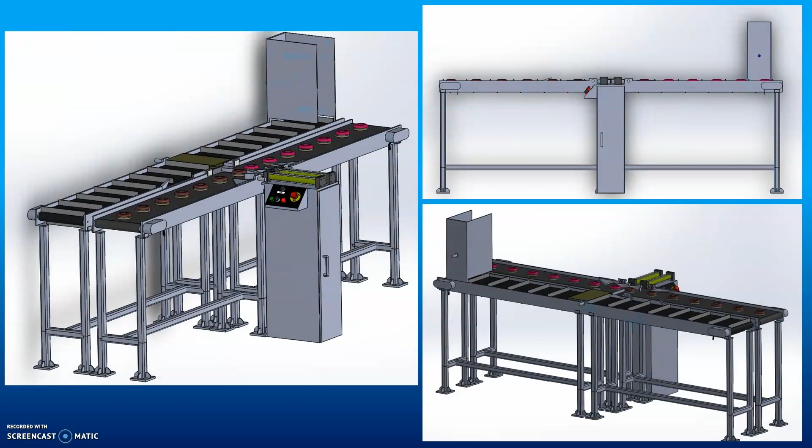Machine designing. For this part we have the design of our project and its different parts.

I will start by explaining the process. In this part, all the process begins or starts. We put the boxes in this container, 15 boxes fit, and this works by gravity. Then the band starts to work at this station.

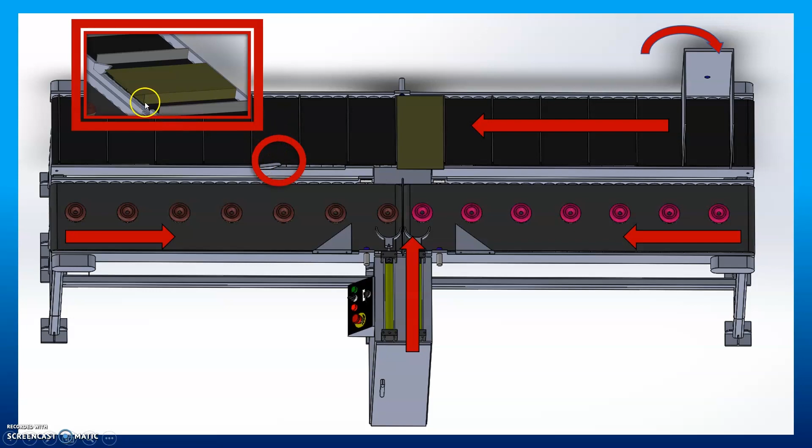In this part, the box is filled with the donuts, and finally we close the boxes with this tab in this part, like this.

This is the place where the different sensors are found in our project. We have 4 sensors. These 2 are for the boxes and this is for the donuts.

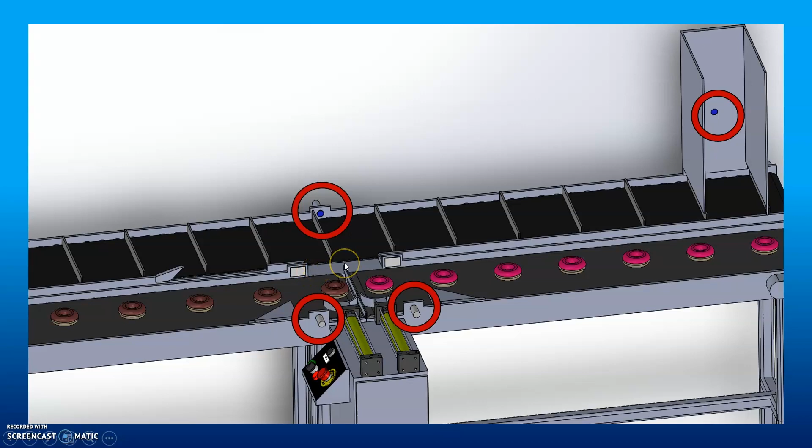And these are the places where the motors and the control panel are located. These 2 motors are for the bands of donuts, and this one is for the boxes.

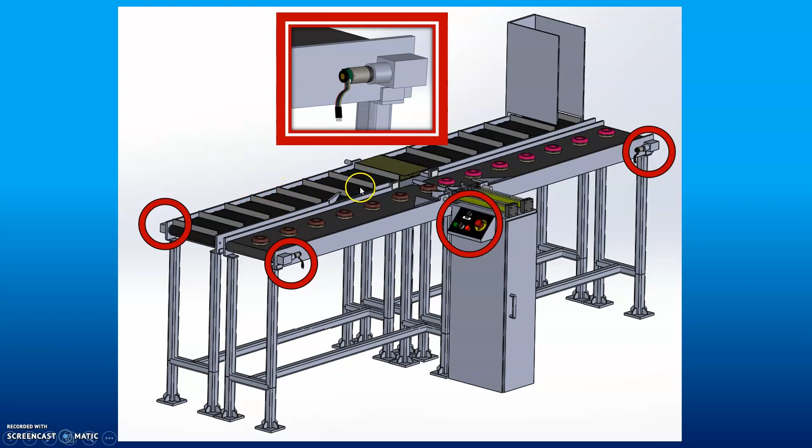Our control panel is very simple. It has turn on and off, the reset button, and the emergency button.

Well, I'll pass it to my partner Angel to explain the controls and actuators.

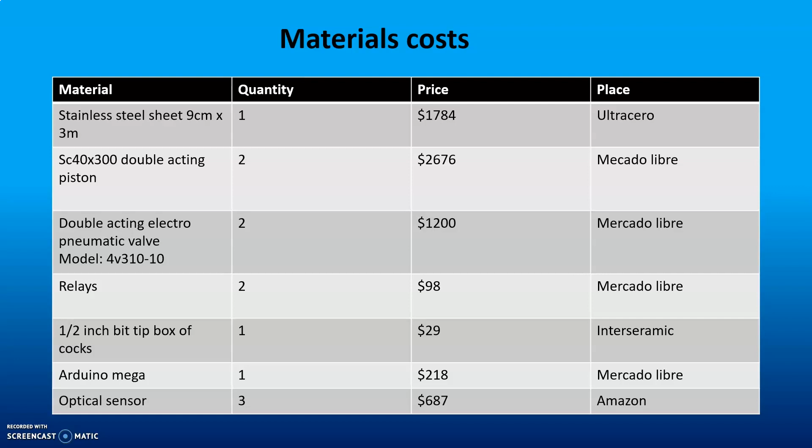And to finish, we go through the cost and manufacturing. Here we put a table with the materials, price, and the place where we find them cheaper. And we put another manufacturing table with the total price and the final cost of everything. And that's all. Thank you.

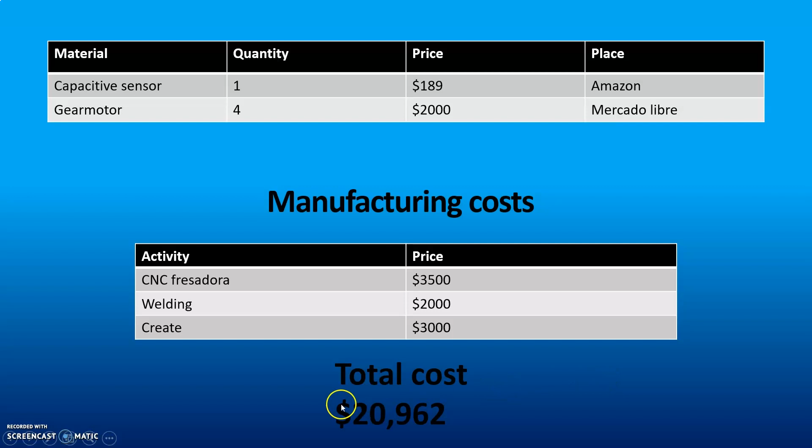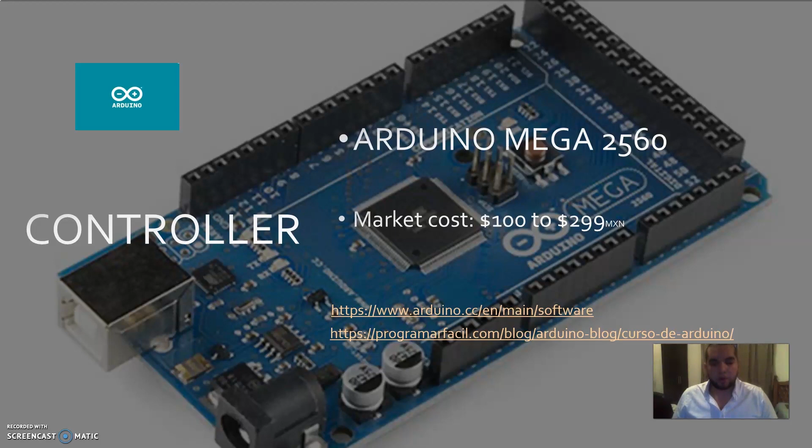In the video, I put 2 links. The first one is the official page of Arduino to learn the program, and the second is a video to learn the basics of Arduino.

The specifications of Arduino Mega 2560 are: more capacity, 256 kilobytes, easy connection with USB cable, speed of 16 MHz, operating voltage of 5 volts direct current.

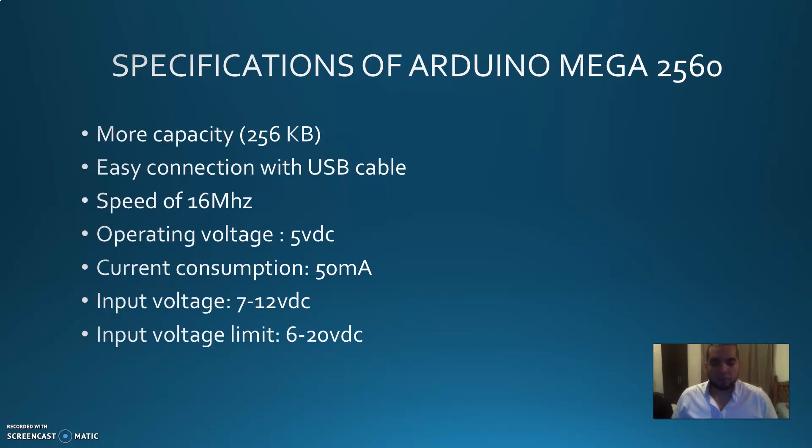Current consumption is 50 milliamperes. The input voltage is 7 to 12 volts direct current, and the input voltage limit is 6 to 20 volts direct current. We have sensors.

We use the optical sensors. It's a Monarch remote. The maximum detection range is 3 feet. The operating voltage is 24 volts, and the working current is 20 milliamperes.

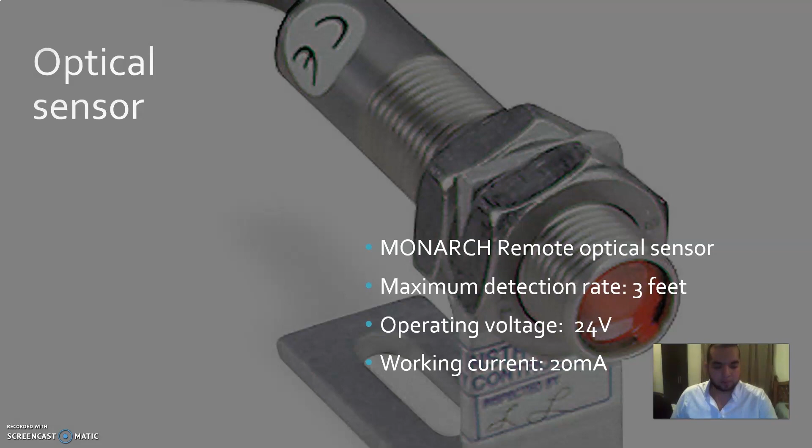The capacitive sensor has a maximum detection range of 0.2 to 0.4 feet. The operating voltage is 24 volts, and the working current is 20 milliamperes.

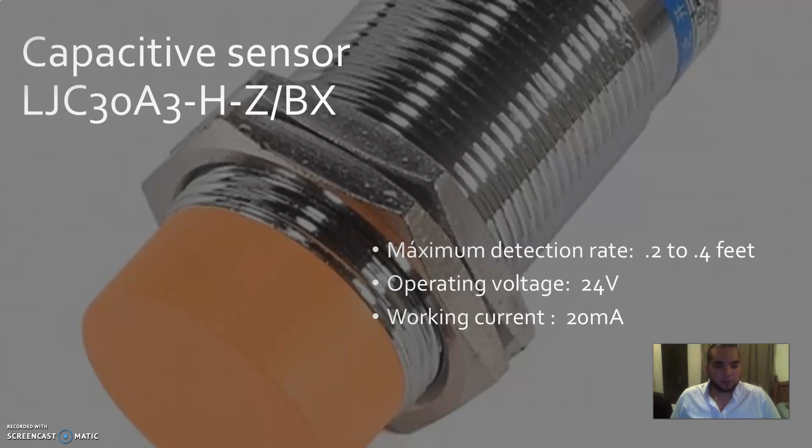This is the piston. It's a double acting piston, 40 to 300 millimeters. This element is activated with an electrovalve.

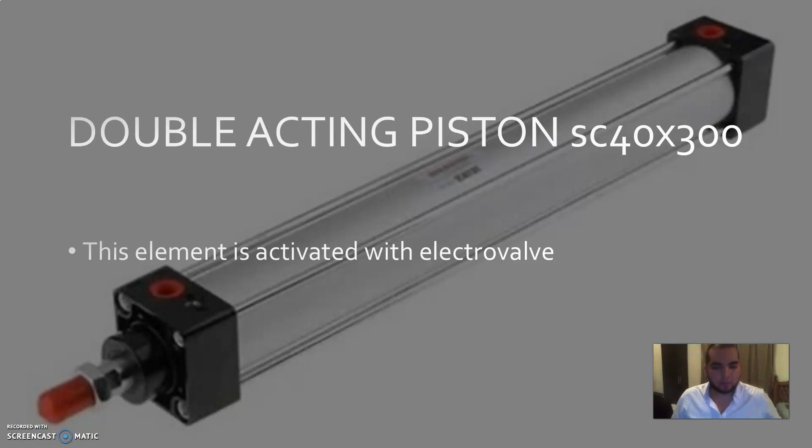We use a pneumatic electrovalve, 5/2 position. The operating voltage is 24 volts direct current, and the working current is 120 milliamperes.

We use relays. The operating voltage is 5 volts direct current, and the working current is 15 to 20 milliamperes.

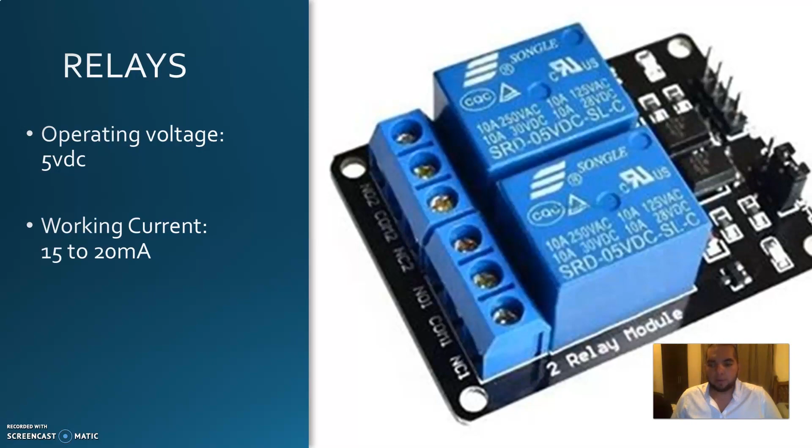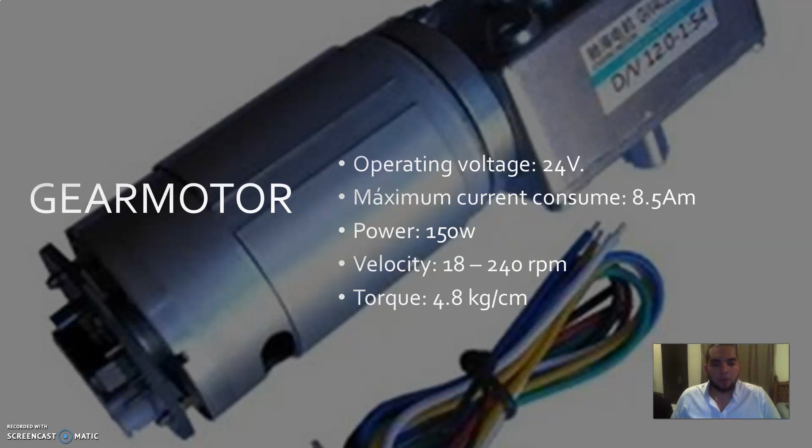We use gear motors. The operating voltage is 24 volts, and maximum current consumed is 8.5 amperes. The power is 150 watts. The velocity is 18 to 240 RPM, and the torque is 4.8 kilograms per centimeter.

This is the kilowatt consumption. We have the elements, the quantity, the voltage and direct current, the amperes, and power. We use one Arduino, 2 optical sensors, 2 capacitive sensors, 2 double acting pistons, 2 electrovalves, 2 relays, and 4 gear motors. The daily use of the machine is 8 hours.

Days per week is 6. The total hours per month is 192 hours. The power consumption is 608.13 watts, and the power consumption total in work hours is 116.7 kilowatt-hours.

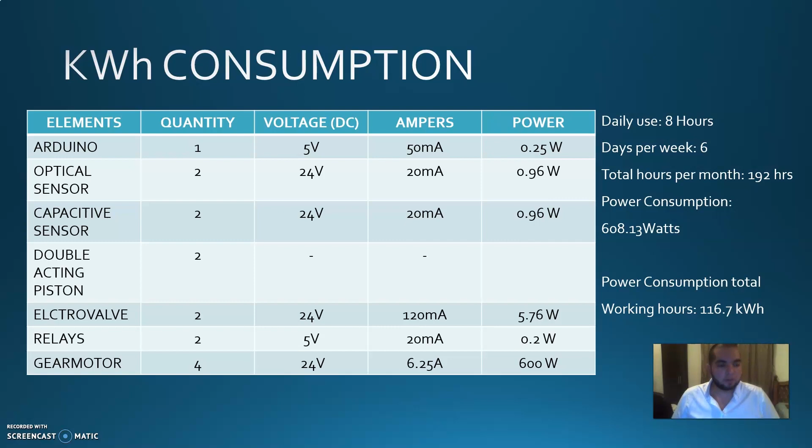In the security elements, the operator of the machine will be at this place of work at the moment the line is turned on. The production line has an emergency button on the control panel, and 2 more: the green to start the process and the red to stop.

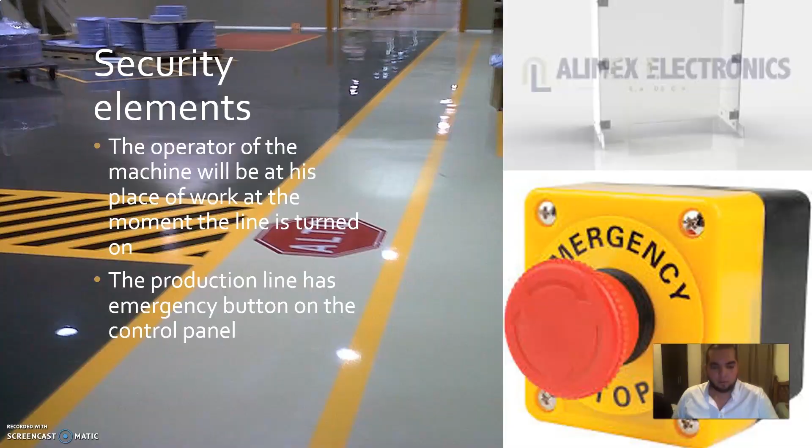The product, the weight, the quantity per cycle, and the total weight. We have the donuts: the weight per donut is 100 grams, the quantity per cycle is 60 donuts, and the total weight is 6 kilograms. In the box, the weight per box is 70 grams, the quantity per cycle is 10, and the total weight is 0.7 kilograms. The total weight per cycle is 6.7 kilograms.

In the structural material, we use tubular profile steel, 18 gauge. With the design we made, the machine can support more than 10 kilograms per cycle. So we have a range for the capacity for the operator's safety.

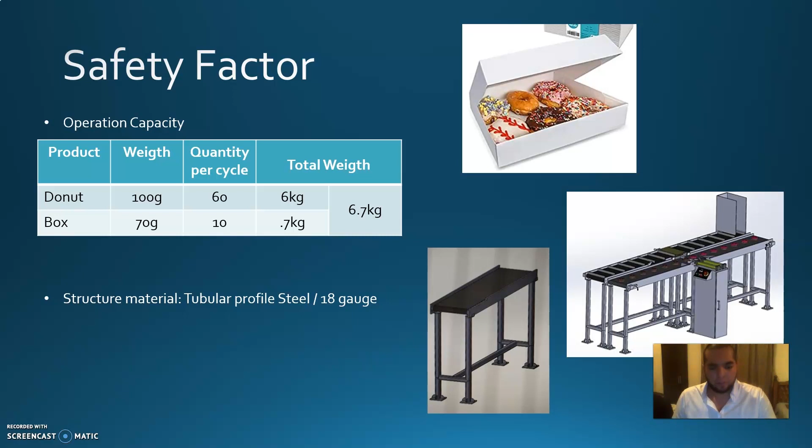In the electric system, for the Arduino connection, electrovalves, and sensors, the total current is 130 milliamperes. So we use 24 gauge, with a conductor diameter in millimeters of 0.510.

In the motors, the total current is 25 amperes, so we use 7 gauge, with a conductor diameter in millimeters of 3.665. For the electrical connection of common use, we use 14 gauge, with a conductor diameter in millimeters of

1.628. To know these values, we use the gauge table. You can use it to choose the correct cable for the connection depending on the total amperage in each section.

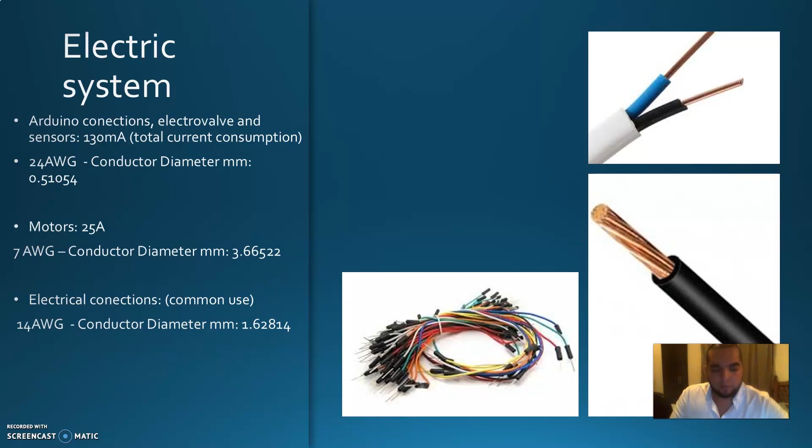For example, in the motors, the total current is 25 amperes, so when you go higher in amperage, it can be 30. So in this case, the gauge is 7, with a conductor diameter of 3.665.

In conclusion, I hope this information about the components will be very helpful for future projects in mechatronics.

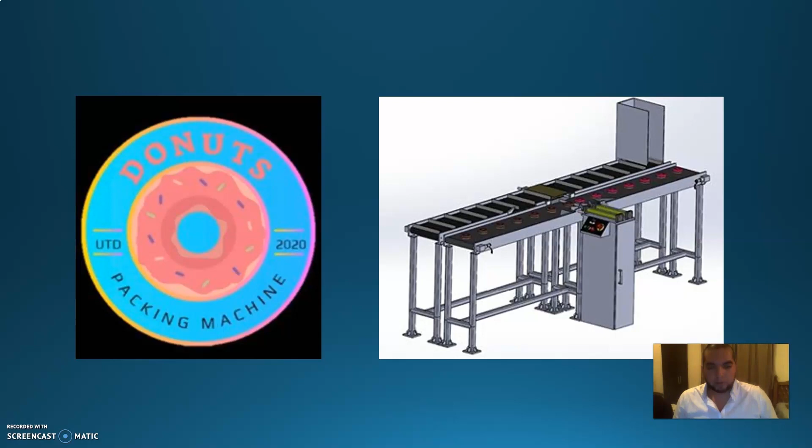Mechanical process: in this part, we have to make the deposit for the boxes that are the donut packages. We have the measurements, and for this process we need 18 gauge stainless steel sheet, 90 centimeters wide by 3 meters long, since it's the most appropriate to not waste material. We decided to use this material because it is in contact with the donuts and could otherwise spoil them.

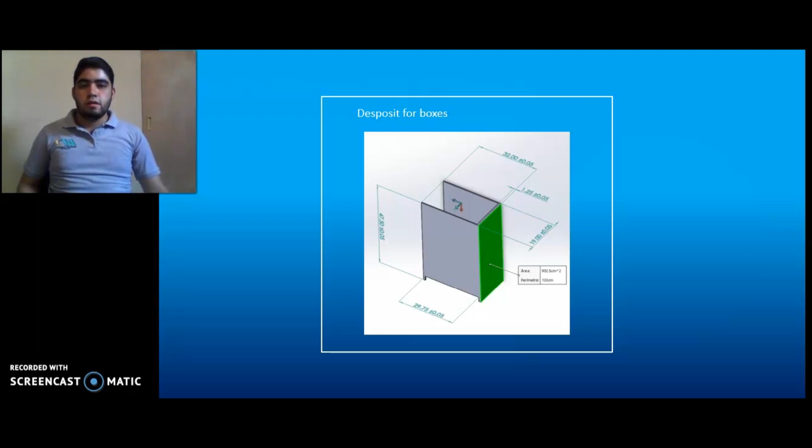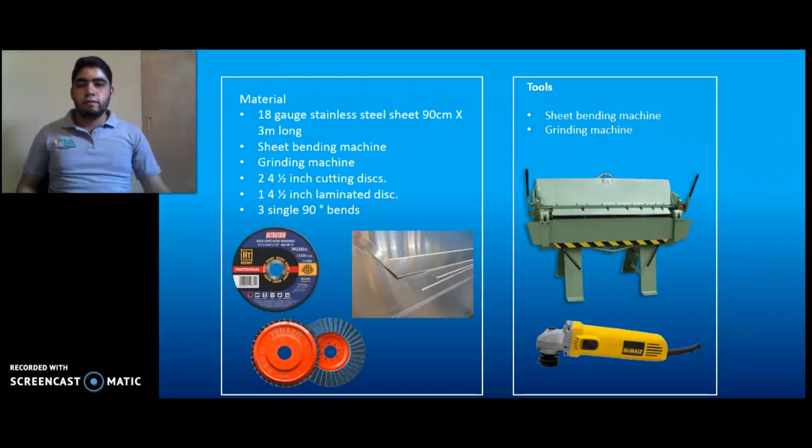We need a bending machine like this one. I think we need to pay for this operation at a blacksmith shop. It's also necessary to use a grinder with a green grinding disc to remove the burr and give it a better aesthetic. Three bends of 90 degrees will be applied to the sheet.

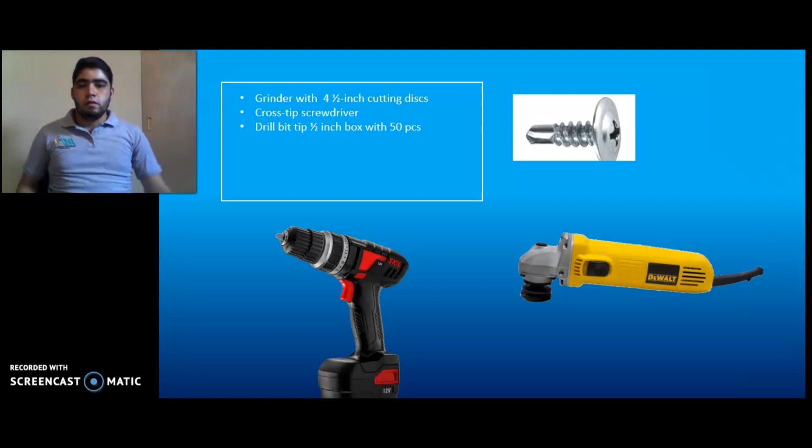Also, we have to make these supports for the conveyor belts with the same sheet. We have to use these tools to put the supports in the conveyor belts.

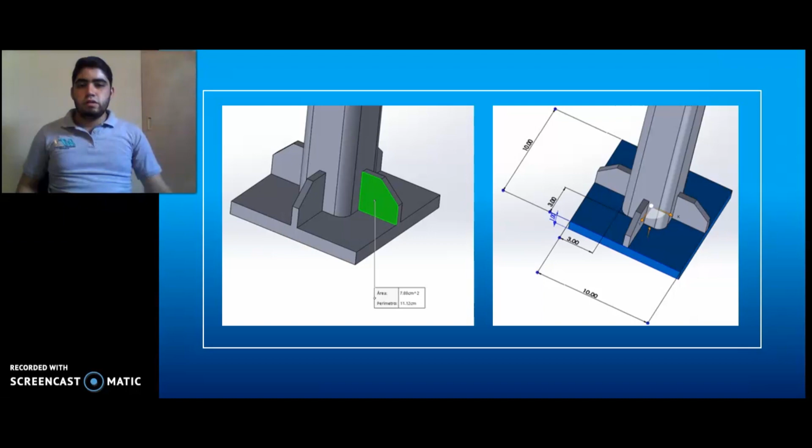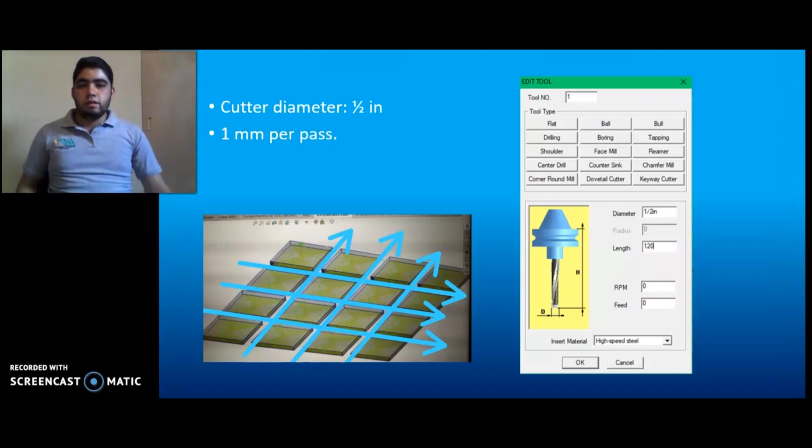It's necessary to use a half-inch diameter tool and go down a millimeter per pass. This is a simple simulation of the operation in the CNC machine.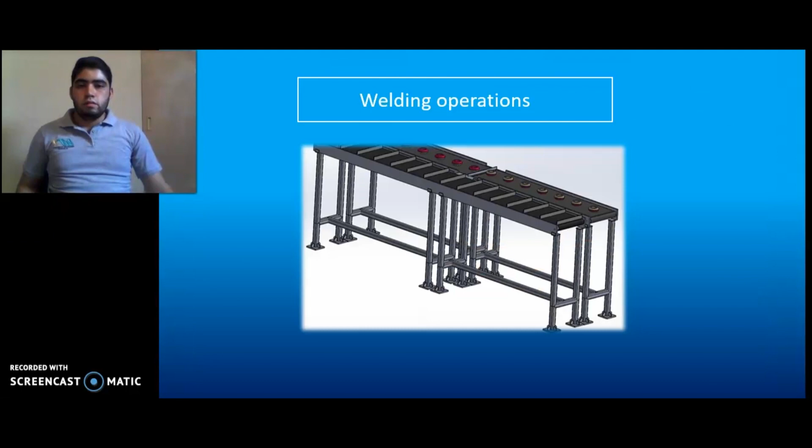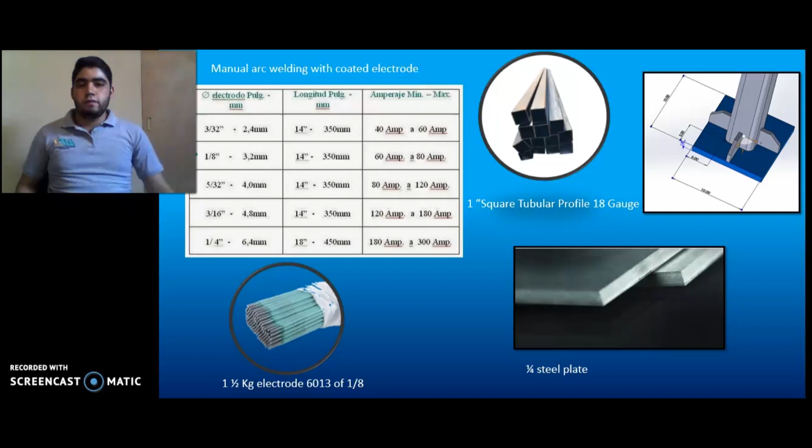Welding operation: it's very important that we follow the security measures to do a good project. We will use manual arc welding with coated electrode, on 1 inch square tubular profile, 18 gauge quarter steel plate, using 1.5 kg of electrode 6013.

After the welding process, it's necessary to use a grinder to give it a better aesthetic.

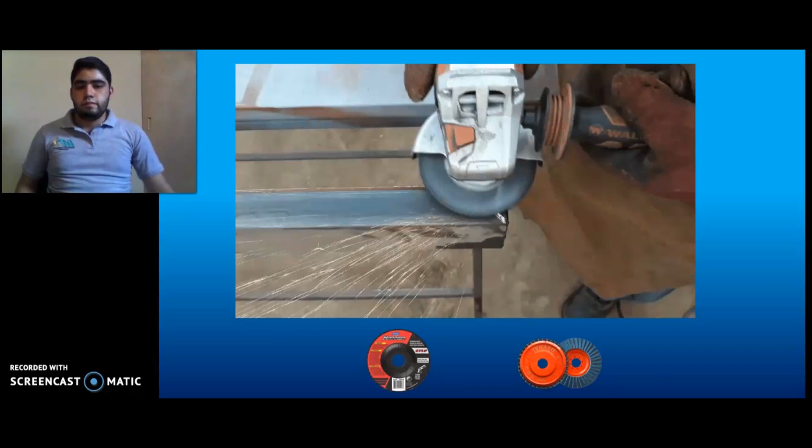Operations with other materials: we searched the different types of conveyor belts and found the best for our project, since it needs one conveyor belt for the feeding application of the donut packages, and it's necessary to use two conveyor belts for the packaged food with the donuts.

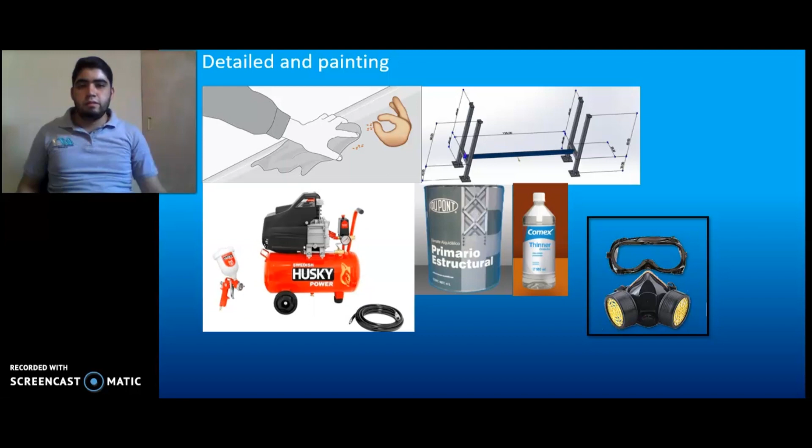Detail and painting: we have to clean the surface that we need to paint. This type of paint is the best because it protects the material and gives it a better aesthetic. It's important that we use a mask to not smell the paint and thinner.

Cutting materials. We need to use a machine to cut the profiles and the disc of 12 inches. That is about the mechanical process.

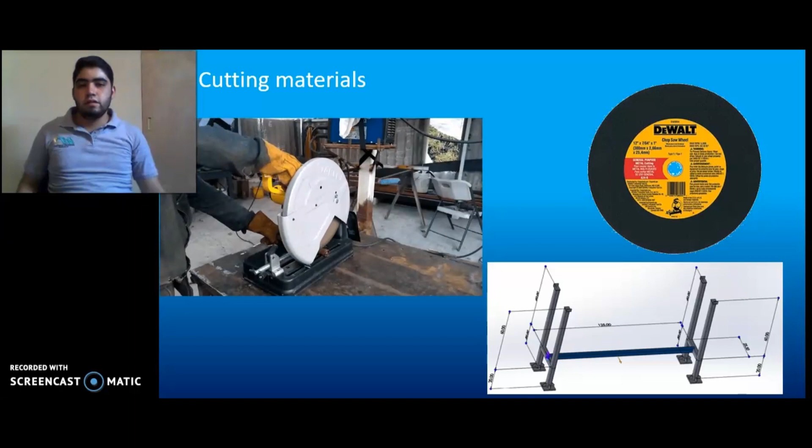Hello everyone, my name is Alan Agustin Orozco, and I am going to talk about the programming part and the circuit about our project. This is our project. Okay, I am going to explain you this part.

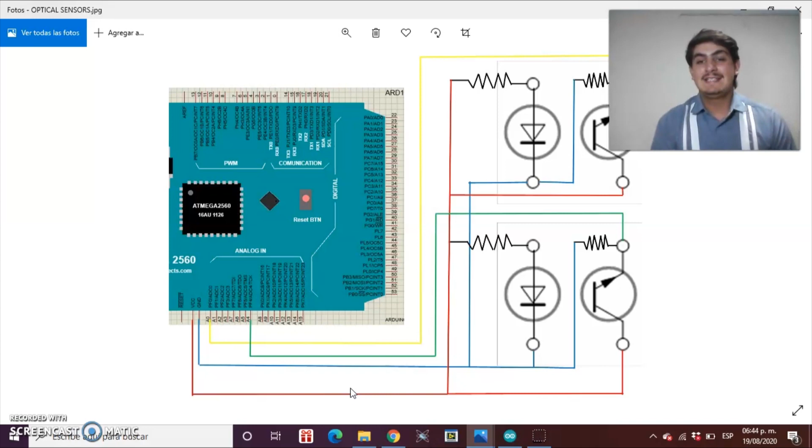These are the optical sensors, and they are going to be detecting the boxes that are going to pack the donuts. This sensor, the first sensor, is going to be here, in this part, detecting boxes.

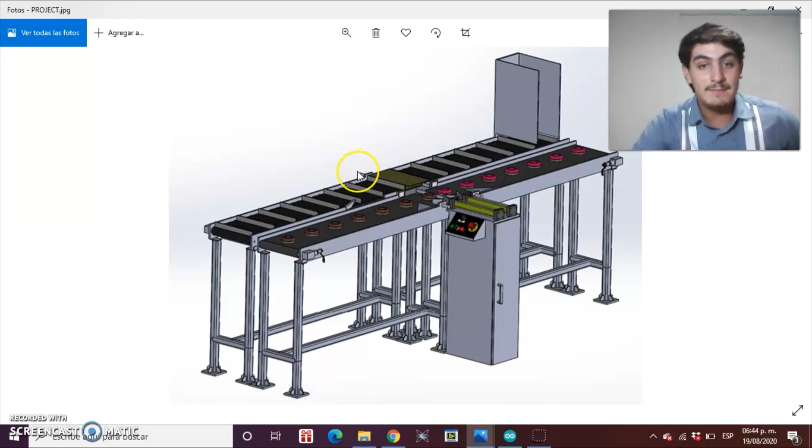If the first sensor detects boxes, this conveyor belt will be turned on until a box arrives at the second sensor, which is going to be in this part. When this second optical sensor detects a box, this conveyor belt will be turned off for a second so 6 donuts are packaged.

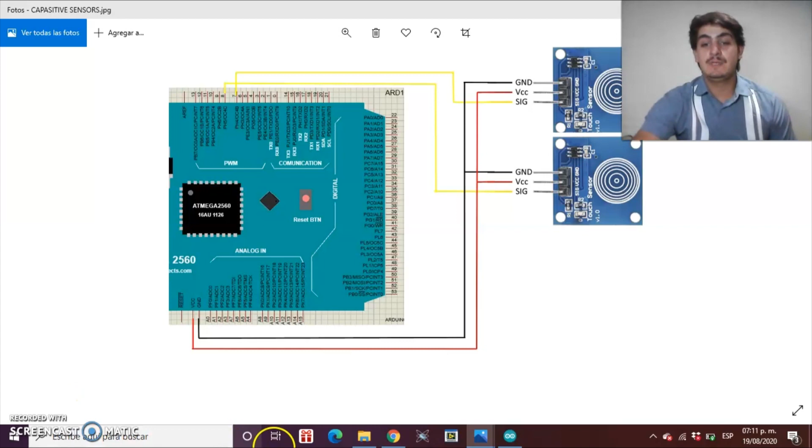These are the capacitive sensors. These sensors are going to be in this part of the project, here and here. How these sensors work is simple: they detect something and send a signal through a pin of Arduino. In this case, it's pin 7 and pin 8.

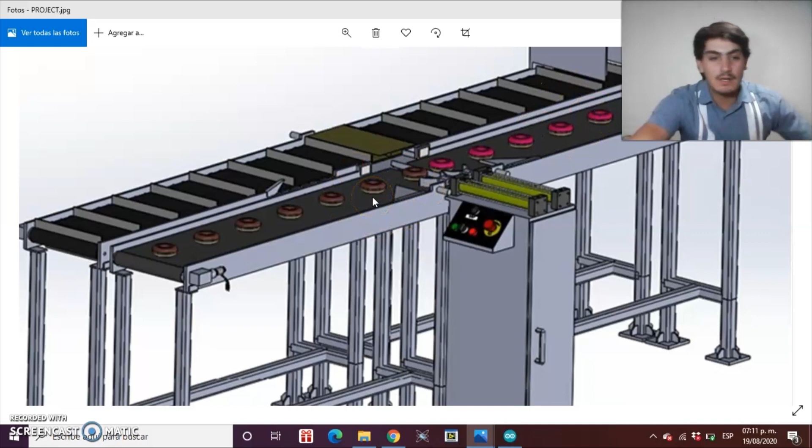The code and the sensors do everything. The capacitive sensors will be detecting if there are donuts. These both conveyor belts are going to be working all the time. When the donuts arrive and the sensors detect them, both conveyor belts are going to stop for a while.

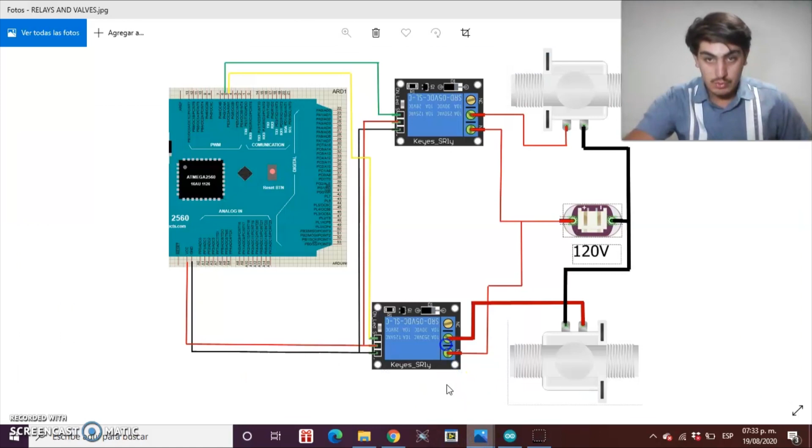When the donuts arrive where these sensors can detect them, two relays connected to Arduino are going to make two valves work. I can show you here: this relay connected to Arduino and these two valves. These two valves will be connected to these two double effects that are going to pack the donuts.

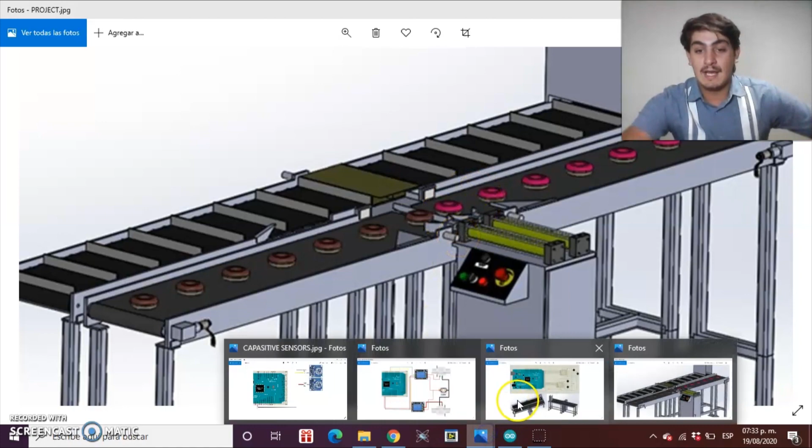This conveyor will be working until the sensor detects donuts again. One important thing is how the three conveyor belts work. I can show you the circuit of the motors that are right here.

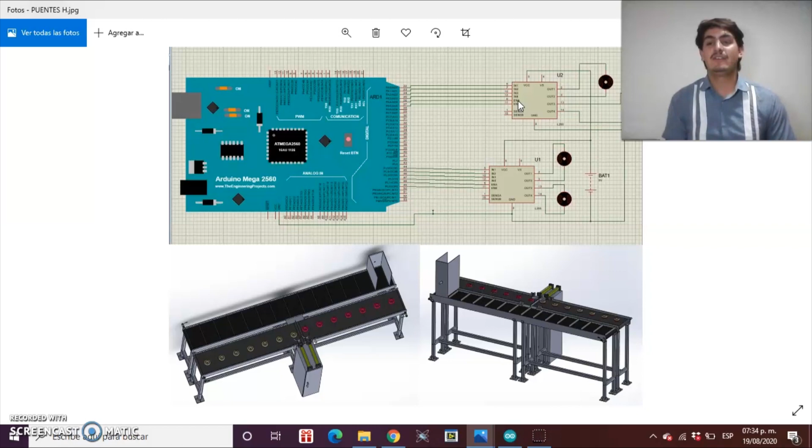These are two H bridges, which will receive the signal from Arduino, and they will make the motors work at the right moment. Now I am going to explain the programming part.

Let's start. I am declaring two Boolean variables for the donut sensors. Here, defining the pins connected to the H bridge. I declare the valve pins. Here I'm declaring the H bridges, the output pins for the relays to control the valves and the cylinders of the double effect.

Here, the optical sensor in this part is detecting the boxes. If this sensor detects something, this conveyor belt is going to turn on. The second optical sensor, here, if it detects a box to pack the donuts, the conveyor belt will stop. If this sensor doesn't detect a box, this conveyor belt will work.

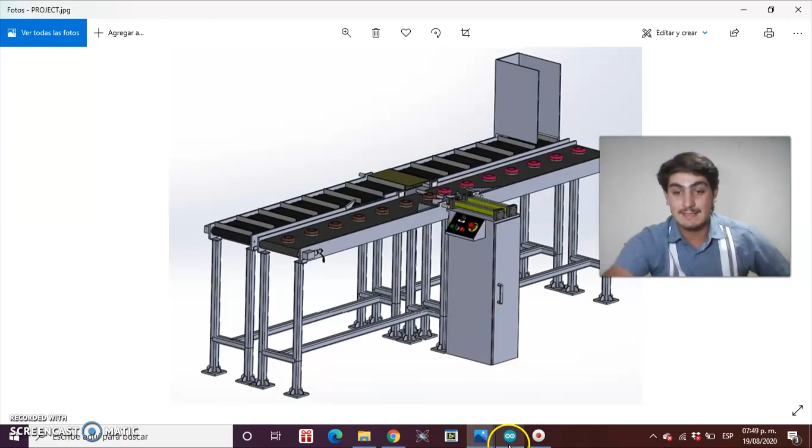This capacitive sensor stops the conveyor belt to pack the strawberry donuts. These capacitive sensors, two of them, are going to be here, like I said. If the sensor detects a strawberry donut, the conveyor belt stops. If the sensor doesn't detect something, the conveyor belt will be working.

This capacitive sensor stops the conveyor belt to pack the chocolate donuts. This is the same as before, but for strawberry donuts this one is for chocolate donuts. If the sensor detects a chocolate donut, the conveyor belt will be turned off. If the sensor doesn't detect something, the conveyor belt will be turned on.

In this part, I establish a counter to count 3 times for the 3 strawberry donuts and the 3 chocolate donuts. Next, this part stops the conveyor belt to pack the strawberry donuts, if the sensor detects something, if there is a donut right here.

That's why I established 2 Boolean variables for this part. If there is a donut, the conveyor belt stops. If there isn't a donut, the conveyor belt will work.